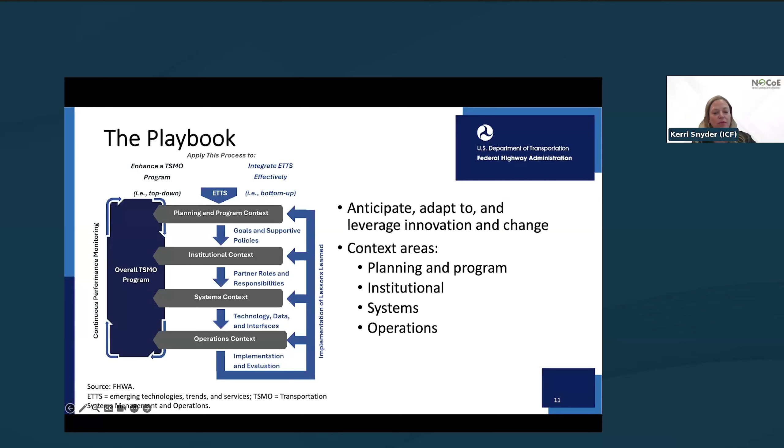As suggested by the cyclical flow of the figure, the playbook really reflects a continuous and iterative process of improvement. Practitioners can use findings from one context area to help inform activities or choices in other areas. They can also use lessons learned from deployed emerging trends, technologies, and services to inform and integrate TSMO recommendations across all 4 context areas.

So why would you want to use this playbook, or how would you come to need it? There are several motivations. For example, exploratory - maybe an agency is interested in the potential of a particular emerging technology, trend, or service, and they're looking for support on how to approach implementation and integration into its TSMO program.

Perhaps an agency is coming off of a recent deployment and is looking to apply lessons learned from that experience to either extend the rollout of what was deployed, or enhance the TSMO program to better support future pilot deployments.

Perhaps a region is interested in attracting and fostering economic development and focusing on innovations related to access, mobility, and safety.

Maybe a region is experiencing a proliferation of emerging technologies and trends, whether it's commercial shared mobility services, and they're looking for how to respond.

From a funding opportunity standpoint, maybe there's a grant out there that you all are looking to capitalize on and want to make sure that your operations and safety programs are aligned with this opportunity.

And finally, maybe your agency is working on developing or updating its TSMO program plan or strategic plan, and you want to think about it in a way that is forward-looking and supportive of emerging trends, technologies, and services.

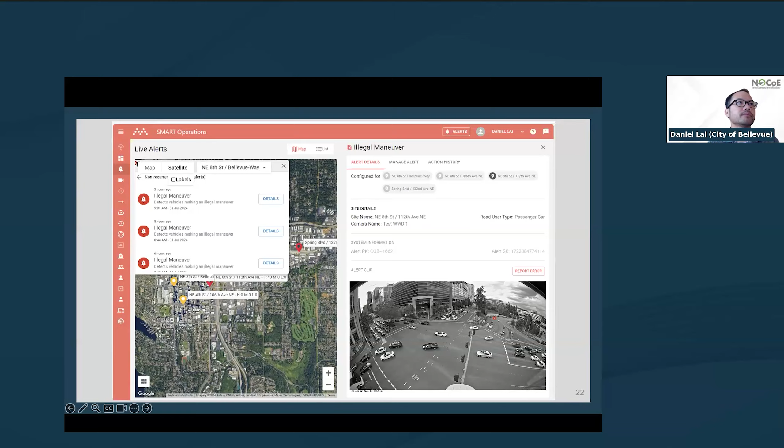And that then led us to our 2023-2024 Edge Compute Partnership. This is where, yet again, we applied a lot of our learns and principles to being able to understand what happens in all of the complex interactions at an intersection.

So with this, we partnered with a LiDAR vendor. The LiDAR imagery is what you see on the right. The traffic camera footage is what you see on the left. And if you click play here, Adam, you'll be able to see the two synchronize with each other, where we are able to see the different movements from all the different modes.

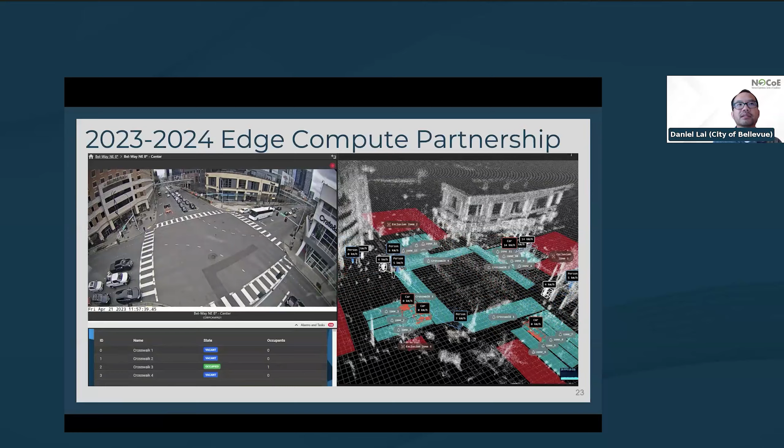But most importantly here, we're looking at the pedestrian modes, crossing the crosswalk on the left here. We are able to see the state of occupancy, whether it's vacant or occupied. And more than that, we can also see the speed of pedestrian crossing and also the occupants in the crosswalk as well.

So that really led us to another opportunity in 2023 where we applied for a SMART grant, and my colleague Kirk will talk more about this opportunity here.

Thank you, Daniel. As Daniel just described, those earlier pilots and projects really set the stage for where we are today. We wanted to take the next step where we could leverage our adaptive signaling to actually move the needle on safety for our most vulnerable road users. That's really where the SMART grant comes into play.

SMART stands for Strengthening Mobility and Revolutionizing Transportation. It's a U.S. Department of Transportation program, specifically designed to fund the planning and prototyping of these kinds of innovative tech-heavy projects. Their ultimate goal is to find solutions that not only work in local agencies like Bellevue, but can be scaled or replicated in cities across the country.

In 2023, we were awarded $1.43 million in stage 1 funding with a period of performance that runs through September of this year. This grant is powering our RTSSI project, short for Real-Time Traffic Signal Safety Interventions. We're using it to test 5 critical use cases that I'll walk you through shortly.

The FY23 SMART Grant program focused on 8 key technologies, and we specifically honed in on smart sensors and traffic signals, because we wanted to build directly on top of the adaptive infrastructure that Daniel just talked about. By integrating smart sensors with our existing traffic signals, we're moving past just managing the flow of cars, and starting to treat the intersection as an intelligent environment that actually sees and responds to every single person using it.

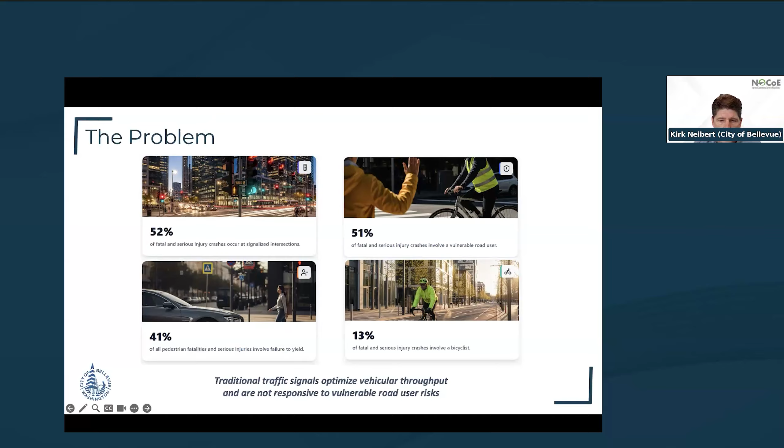As Daniel talked about, the big opportunity we saw is from how the technology has evolved over the last few years. We finally have the processing power to do more than just record videos. We can now perform real-time interventions.

By processing data at the edge, meaning right there in the traffic cabinet, we can spot risk factors and intervene in milliseconds. With our adaptive system and high-speed fiber already in place, we can implement and analyze the accuracy of use cases that really just weren't realistic in the past.

We're really now looking for a high impact shift. We want to move away from pedestrian phases that simply run on timers to an intersection that can see a mother with a stroller or a bicyclist and then adjust itself to keep them safe.

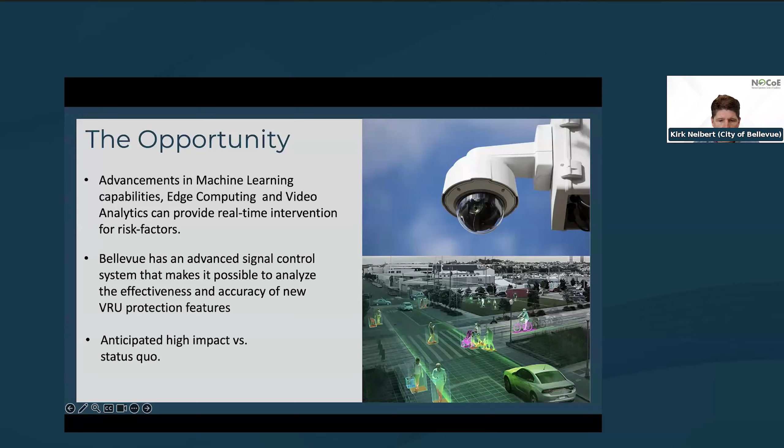We have an edge computing device right in the traffic cabinet, identifying the type of user, their speed, their trajectory, all in real time. It's constantly asking, is a qualifying event happening, such as a pedestrian still in the crosswalk as the walk phase time is running out. When that trigger happens, the edge device will send a signal through detector inputs to the traffic controller, and the controller is what's running the logic to intervene. Maybe it's extending a walk phase or turning on a no right turn sign, but only if the signal phase allows it to happen safely.

Let's go to the next slide.

For the RTSSI pilot project, we picked 7 intersections to represent a mix of high volume and high risk areas in Bellevue. Our Crossroads and Factoria areas are dense, diverse neighborhoods with a ton of pedestrian activity. We added 2 locations in downtown Bellevue to test the solutions in a higher density urban core with really complex movements. We're live testing several use cases at these spots, focusing on protecting people in the crosswalk or restricting vehicle moves like right turns on red and left turn phasing.

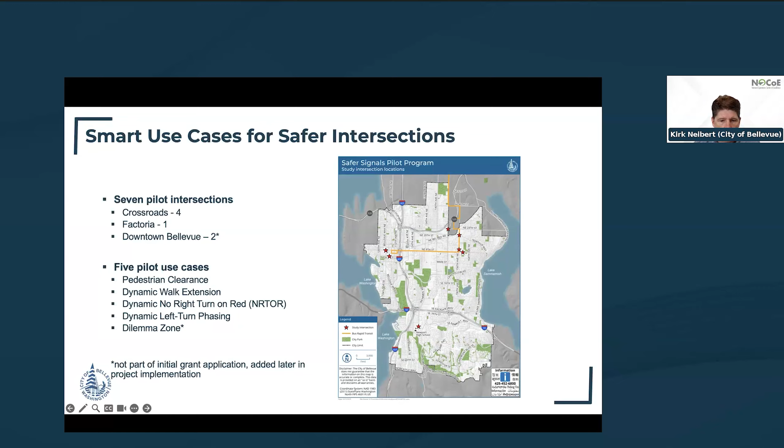So let's see what this actually looks like on the ground. If we can go to the next slide.

So why does this matter? It directly hits the number one cause of exposure: being caught in the crosswalk when traffic starts moving. It's about protecting our seniors, protecting our families who may just need a few more seconds to cross. It really turns a high-risk intersection into a more responsive one.

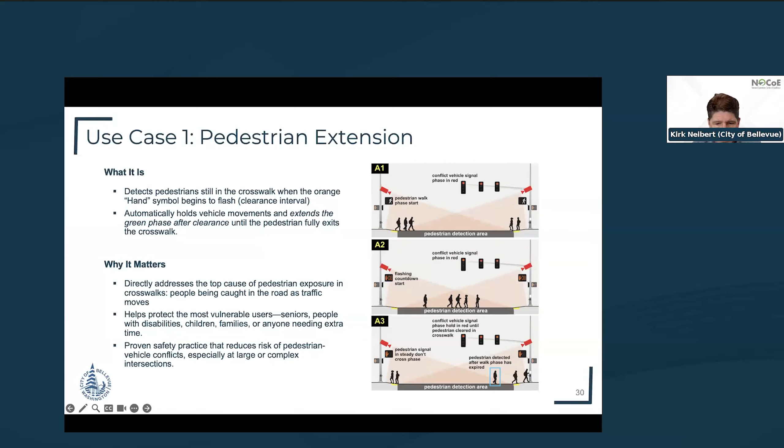Let's go to the next slide, and we have a video that shows why just having a static walk timer isn't enough. If you look in the upper left, you'll see a couple with a dog. This dog is very excited, he's got a ball, he's ready to go. The walk phase is already on, but the couple is still on the curb trying to get their dog under control, so they don't even step into the street until the countdown is well underway.

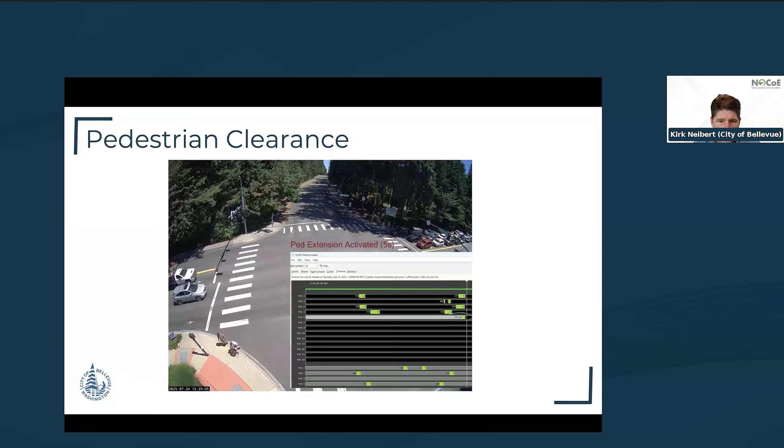They're crossing, and then the dog loses his ball into traffic. They have to wrangle him, pull him back. Now watch the signal: the pedestrian phase ends while they're still in the intersection. But because our sensors are tracking them, the RTSSI system intervenes. It holds the red light, giving them those extra seconds to clear the lane before the conflicting phase vehicles are released to go through. Again, it's a great example of how the system adapts to real-world unpredictability.

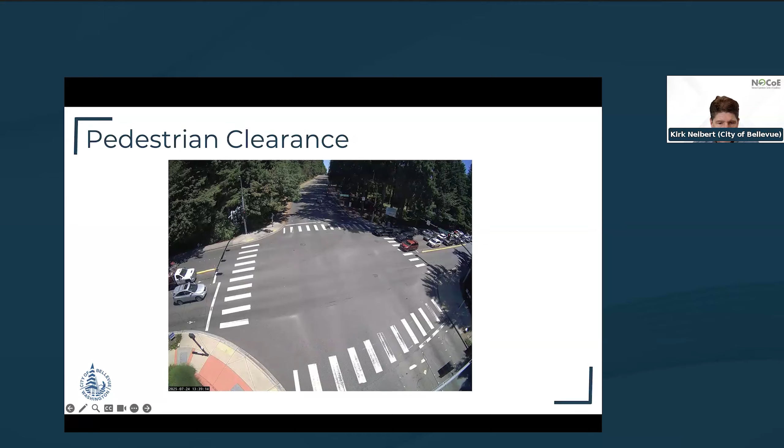Let's go to the next slide. Our second use case is what we call walk extension. While the previous ped extension use case added time at the end of the phase, here the walk extension is more proactive, adding time right at the beginning.

Looking at the diagrams, A1 shows we provide an initial 7 seconds of walk time when the walk phase starts. But our sensors are counting everyone entering the crosswalk, as well as detecting their speed. A2 shows that if the sensors see a large group, like a crowd who may have just gotten off a bus, or someone using a mobility device who may need extra time, we can immediately bump that 7-second walk display up to 15 or even 20 seconds. In A3, the point is ensuring everyone has time to actually get into the crosswalk before the countdown even starts.

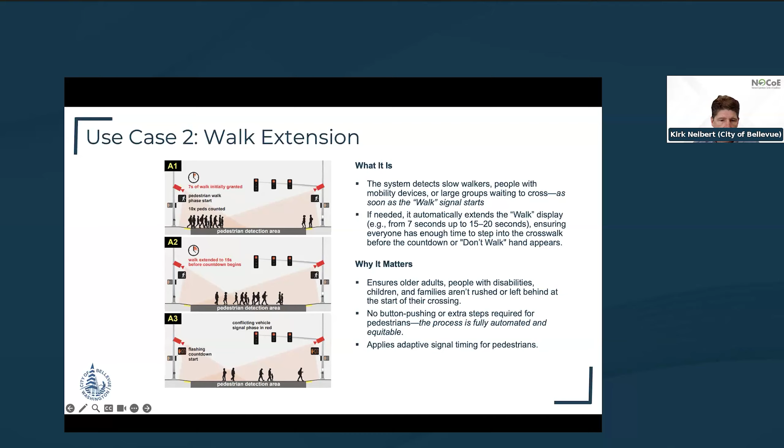This matters because now seniors or families with strollers or using mobility devices don't feel rushed or left behind the moment they step off the curb. There's no button pushing required, the technology just adapts to the needs of the pedestrians.

So if we go to the next slide, we can look at a video demonstrating this use case. On the left is a standard camera view of a couple crossing, one using a walker, and on the right the same intersection is depicted by a synchronized LiDAR point cloud. The important thing is what the system is doing with that LiDAR data: it's not just classifying the objects it sees, it's calculating their walking speed in real time.

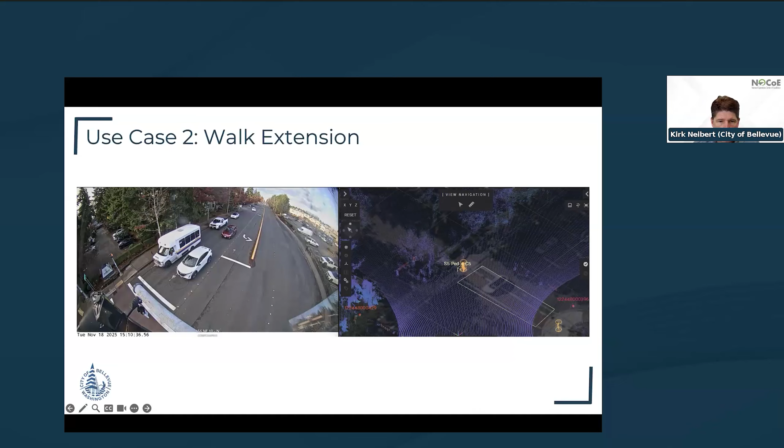Because of the mobility device, this couple is moving a little slower than average, and once the system detects they're below a certain speed threshold, it tells the controller to extend the walk signal. When the couple enters the video, they had 7 seconds; we see they're walking a little slower, and we've extended that to 15 seconds. Again, it ensures they aren't met with a flashing countdown while still in the first few feet of the crosswalk, making it a much safer, less pressured experience. Let's go to the next slide.

So use case 3 is what we call our dynamic no right turn on red use case. And this hits that common conflict where right turning drivers are looking left for a gap in traffic, and they may fail to see pedestrians who are entering the crosswalk from their right.

So instead of a permanent no right turn sign, we installed dynamically actuated blank out signs at our pilot intersections. In A1, when we detect that there's a significant number of people waiting to cross, it triggers a restriction. We're currently using 5 pedestrians as our threshold number, but if there are less than 5 people waiting to cross, the sign stays off to avoid any unnecessary delays for drivers. Then A2 shows that once the walk phase starts, we actuate the sign and it prohibits right turns into the path of pedestrians who may be getting ready to cross.

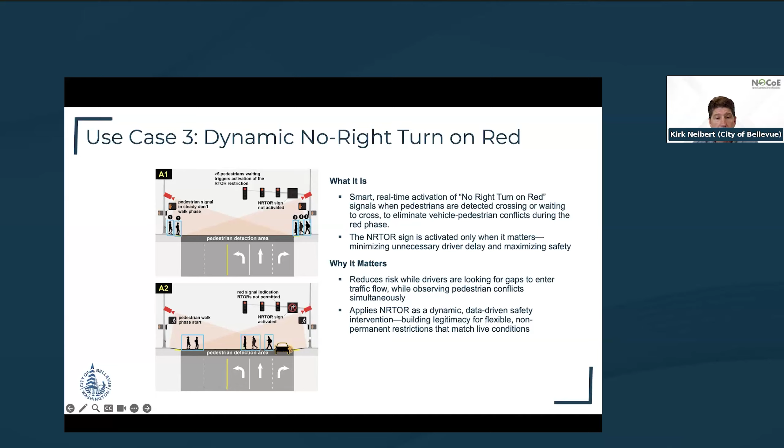And this matters because it's really about data-driven safety. It builds legitimacy because drivers see that the sign is only on when there's a valid need for it. It removes the guesswork and it keeps pedestrians from having to compete with turning cars.

So we go to the next slide. Again, I have a video and I'll set it up. There's a lot happening in this video. So again, we have the same split screen with video on the left, and we've got the LiDAR point cloud on the right. Can you pause it one second, please? Or actually just reset it to the beginning. Yeah, so I want to kind of explain what's going on here.

So it's a little hard to see, but on the video side, you'll see that we have a blank out sign located in the upper right part of the intersection, and right now it's off. But you'll see that there's a white car approaching down below on the right with the intention of making a right turn. And again, now if we look at the LiDAR view on the right, here you can see the system has counted 5 pedestrians waiting. You can't even see all the 5 pedestrians on the video, but you can see them with LiDAR. We've got 3 pedestrians on the right-hand side, 2 pedestrians on the left-hand side waiting to cross, and that's our threshold.

So now if we cue the video, as we start the video, you can see that the white car has gotten there just before the walk phase. They've turned safely. But immediately after, as the walk phase starts, the system triggers the sign. And the next vehicle approaching down below, this red car, it sees the restriction, the blank out sign is now on, and it has to wait, so it lets all 5 pedestrians cross without any conflict. And we don't show it on this video, but when the number of waiting pedestrians drop back below our threshold, then the sign goes blank again.

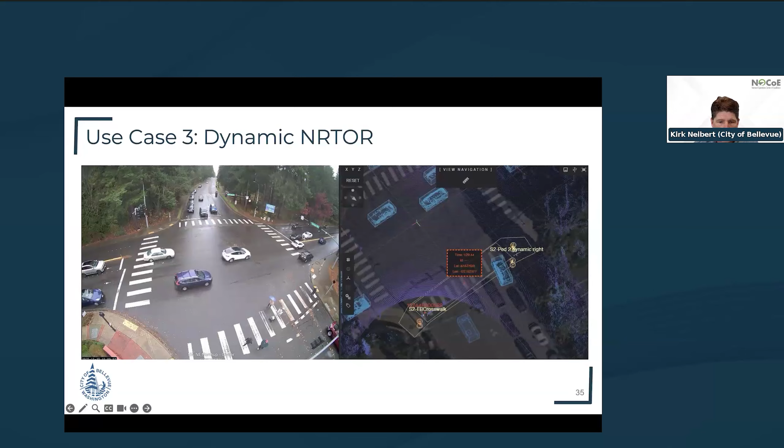It's really a surgical intervention. We only restrict that right turn when we detect the potential of a high-risk conflict. I'm going to the next slide. Yep, we can go to the next slide.

Okay, so this next use case is what we call dynamic left turn phasing. And this one is about that judgment call that you have to make when you see those flashing yellow left turn arrows. In this case, our sensors are performing real-time gap calculations of oncoming traffic. So if there are safe, consistent gaps, usually more than 7 seconds, then we can keep the signal in its permissive phase. And that's represented by the flashing yellow arrow. We let the driver decide when they want to make that left-hand turn.

But if that gap gets too small or too unpredictable, then we dynamically switch to a protected phase. We're either going to make that solid green arrow solid for a protected left, or we can change it to a solid red arrow that restricts the left turn until those gaps in oncoming traffic improve to safer levels. This is about reducing the cognitive load on the driver. We're trying to take the guesswork out of whether a gap is big enough so we can maximize throughput when it's quiet, but prioritize safety when it's busy.

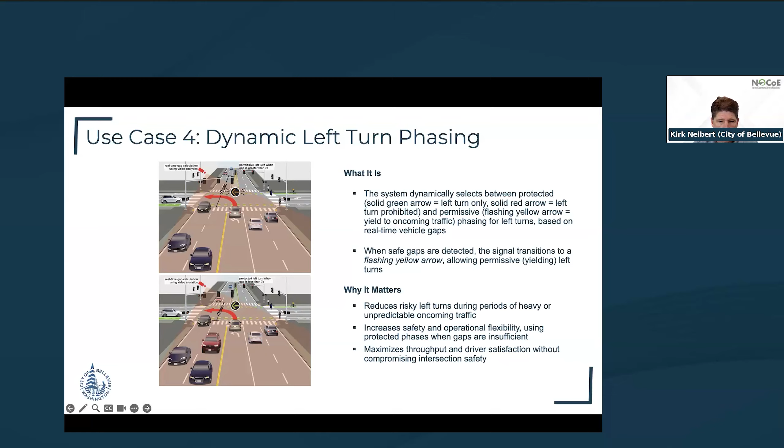So those are the primary use cases we've been piloting, but the big question is: is it actually working? To walk you through what the data is telling us so far, and share some results from our initial validation, I'm going to hand it back over to Daniel.

Thank you, Kirk. We were able to partner with the Insurance Institute for Highway Safety here, a great partner in this project, to help us evaluate efficacy and accuracy, and whether we're even moving the needle relative to safety, because that was the core mission of this project.

What you're seeing on this slide is a bunch of dots depicted in blue and a bunch depicted in pink. The main thing I want to draw your attention to is that pre-intervention, many of the dots were much higher on the scale, meaning there were many more near-miss interactions than post-intervention. We saw this across all five intersections we studied, some more than others, but generally the theme is a consistent reduction.

For the two we have currently evaluated in the preliminary study, we saw a 42.9% reduction in the dynamic no-right-turn-on-red use case, and roughly a 52% reduction in the walk extension use case. So we're seeing a lot of promise. We continue to study and evaluate these use cases, and we're set to deliver our final report to the US DOT in September, where many of these results will be refined and evaluated at a higher level of rigor.

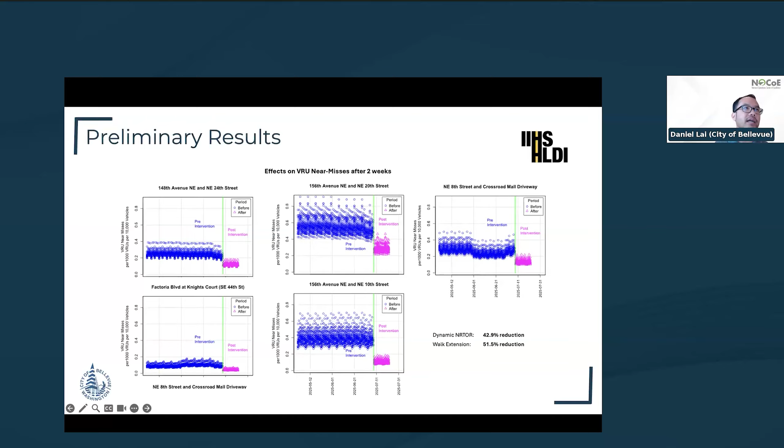Next slide. This project also helped us build confidence that some of the core competencies in discerning and detecting pedestrian and vehicle interactions leads us to the hypothesis that there may be other use cases that might add safety, complementing what we're doing.

The specific one we are highlighting here is called a dynamic leading pedestrian interval. It's the notion of giving pedestrians a head start in the concurrent phase where vehicles might turn. Those familiar with this treatment, used across the nation, know it typically provides a 3 to 5 second head start for pedestrian crossing.

In this example, we're moving away from that 5 seconds being a static quantity of time. We're also assessing the pedestrian's placement in the crosswalk against where the projected right-turning vehicle's wheel path might be. The condition is either 5 seconds, or until the pedestrian has departed that zone of influence, or high-risk area. So that movement, that LPI, is now dynamic in the sense that we won't lift it until the pedestrian has departed.

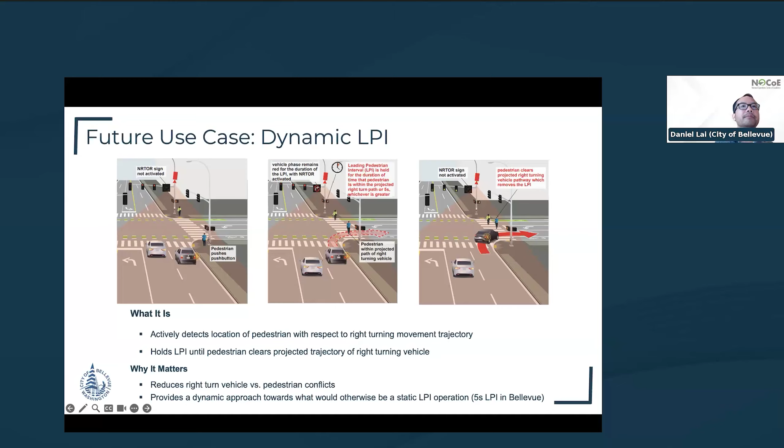We've learned a lot from this project. Much of this was very novel when we first began, but we've learned a lot and determined core competencies in many of these different forms of technology. What's important is how we take this and apply best practices as we continue advancing the state of practice.

The first point is that there needs to be constant engagement between cross-disciplinary partners, and this needs to happen early. We need to involve different stakeholders, be it IT departments, traffic engineering, community members—really cross-functional teams anticipating different challenges together, helping to accelerate solutions and build public trust.

A lot of this technology is new, and there are a lot of questions raised about privacy and transparency. We want to reinforce that the way we design these systems and data flows, we are not collecting any PII of any nature—all of it is anonymous. We proactively publish privacy policies that help inform the public how we are being good stewards of these technologies and data formats we receive.

And then we really want to test innovation with live demos and with a feedback loop as well. Many of these use cases are new.

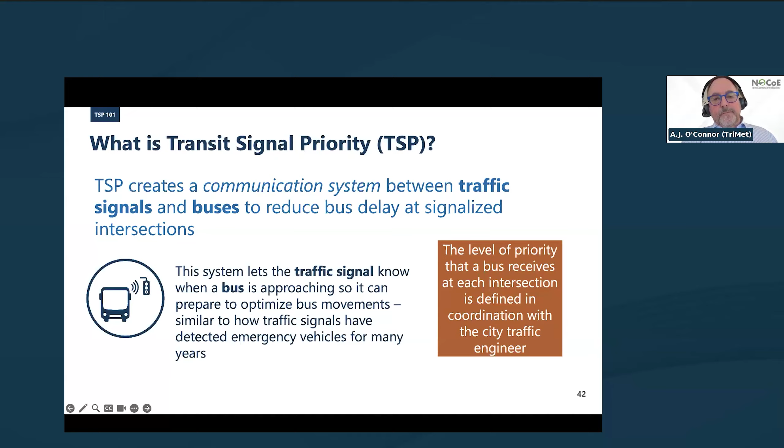It is a win for most everyone involved, especially as we have gone to the cloud-based version. We have proven with our first implementation of cloud-based TSP that it has not resulted in any delays for pedestrians or cyclists. We have documented proof that it has reduced our greenhouse gas emissions, and it has improved the reliability on our corridor and our speed.

To understand the transition from this emerging technology, I need to explain a little bit about the old technology. The legacy system that we implemented in the 90s added an optical infrared emitter on the bus. An optical detector was added to each traffic signal that was integrated into the signal controller in the cabinet. We implemented this completely across TriMet's region.

The disadvantage of this system, although it was cutting edge in the 90s, is it really relies on line of sight. That request from the bus for priority only happens within the range of the infrared signal.

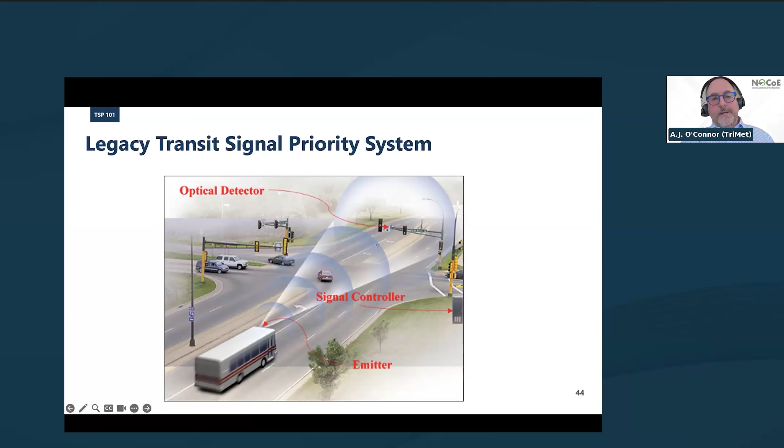There are drawbacks to that. It requires that the detectors are regularly cleaned and ranged. They move over time, so there was a fair amount of maintenance required from our regional traffic partners. As you can imagine, in Portland, Oregon, it rains a lot, and sometimes the detection didn't work. The other big drawback of this system is getting performance data on how it was actually performing was tedious at best. So those were the challenges we had.

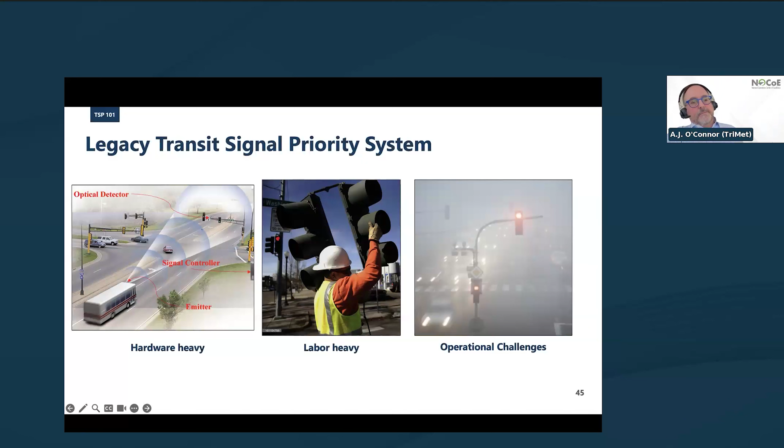So what is the difference with a next-gen or cloud-based TSP system? We're no longer relying on that infrared optics. We're relying on information that TriMet was already collecting for our CAD AVL system, which is computer-aided dispatch automatic vehicle location system, which most major transit agencies and even medium-sized transit agencies now have as standard on their buses.

And the new system sends basically all that information to our cloud-based partner, which in our case is LYT. It gave us an enormous amount of data that the transit agency and our regional traffic partners were not able to really get out of the old system. To be clear, we're running a hybrid right now between the old and the new. We're slowly going to be transitioning over to a complete cloud-based system over a number of years.

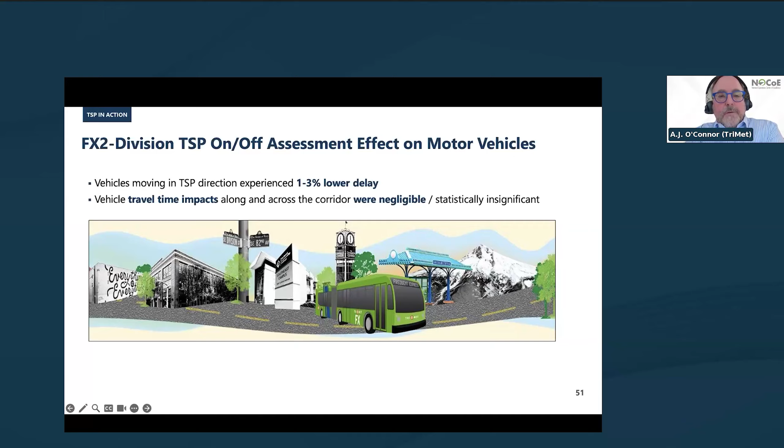Moving forward, back to the planning and institutional context, TriMet has labeled our internal group Better Bus, where we are working with all our regional traffic partners and through our MPO to identify projects where we can improve transit reliability, speed, and capacity, and have identified a group of projects where we will continue to try and roll out the next gen cloud TSP.

One thing to note is our Better Bus program is viewing emerging technologies like cloud-based TSP and other systems as just one tool to increase transit reliability and speed. Better Bus also includes physical changes like bus-only lanes, things of that nature.

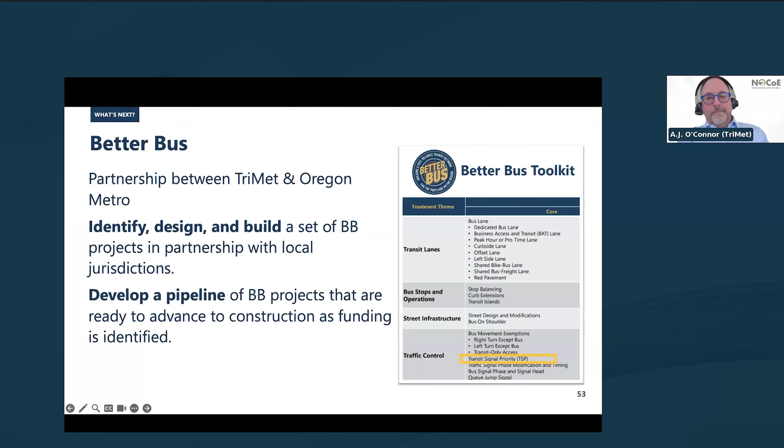So this is just an example here of what we have lined up next. The line 33 is a fairly long line that is going to be implementing TSP. That is probably the next major one. We also are identifying small spot projects and intersections where we can add the cloud-based TSP or queue jumps.

We were lucky that the region had already standardized on a central signal system. Everybody in our region is using Q-Free as their central signal system, with a couple minor exceptions, and the modern ATC controllers that are going in are all Q-Free. So implementing TSP in new locations, just having one traffic controller vendor and central signal system to integrate with helps tremendously.